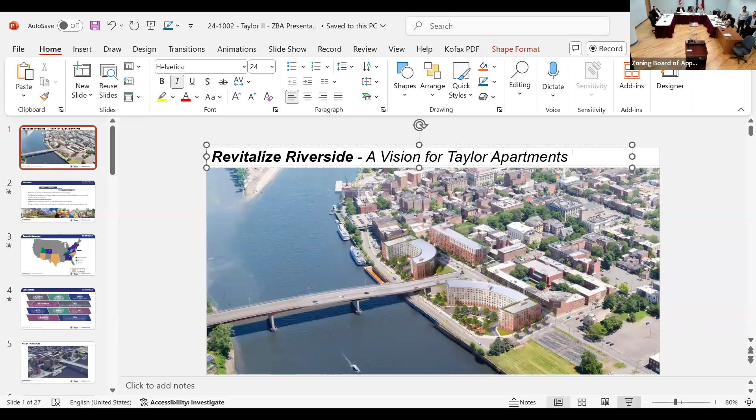Is this enabled? I can see this. Does it say enable? Or share? Share, yeah, of course. You can have my pencil. I'm using my red pen anyway. Actually, you know what you can do? Go to David's name, and then there's like 3 dots. Who, the mouse? David Marin. Okay, yeah, and then the 3 dots, and you should be able to just hit share. Yeah, it's not depend, I don't think. No, it's allowing you. Yeah, hopefully everybody else can see it. Okay. Little bit of delay.

Okay, good, all right. So next item on the agenda is PLZBA 2024-0022, 125 River Street.

This is Taylor 2, proposed 2 mixed-use buildings consisting of 308 residential units and just over 2,000 square feet of ground floor retail space. 2 6-story buildings on top of a 1-story parking structure.

The variances in front of us tonight are a front setback variance. Front setback within this zone is a 10-foot max, so setbacks of 11.5 and 13.2 feet are proposed for buildings 2 and 3 respectively. So relief of 1.5 feet and 3.2 feet for buildings 2 and 3.

Also a side setback variance, a relief of 14.6 feet and 25 feet for buildings 2 and 3 respectively. The applicant is seeking relief from the rule that freestanding parking structures and surface parking lots shall not be built adjacent to the river or any public pathway easement, in order to provide parking adjacent to the Hudson River.

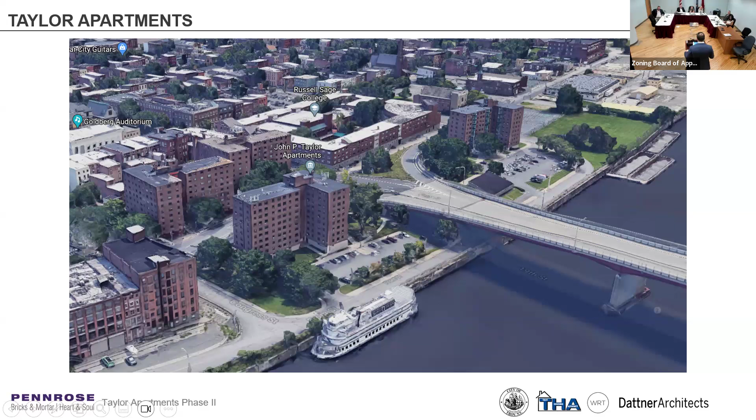So in the late 90s, early 2000s, the city, as part of its master plan, had developed a plan for this waterfront area. It was part of Realize Troy. And then within that master plan, the Housing Authority put out an RFP for the redevelopment of the Taylor Apartments, requesting proposals from developers around the country to come up with a plan to redevelop these properties that were really outmoded.

Taylor's 1 and 2 had been vacant since 2005, just boarded up, sitting there. Taylor's 3 and 4 have over 100 residents, as they do today. I'll get into that a little bit later.

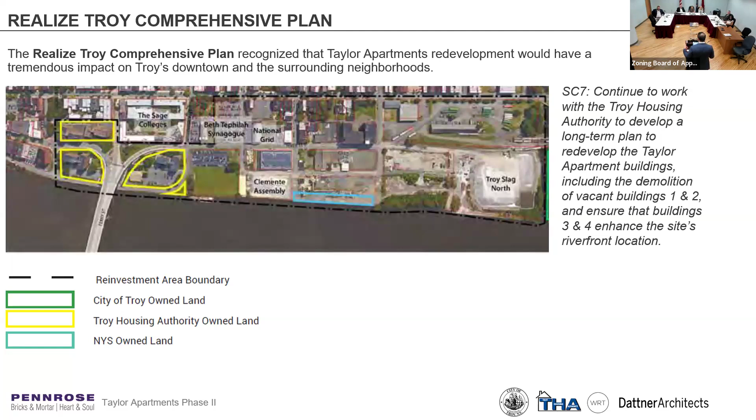I'm going to let Jen really talk about the architectural design and site plan, but part of the overall City of Troy plan was to not only redevelop the Taylor Apartments, but also redevelop the bridge, which you can see here with the ramps. The plan here was to get rid of the ramps, to square off the site and develop it as a full city block.

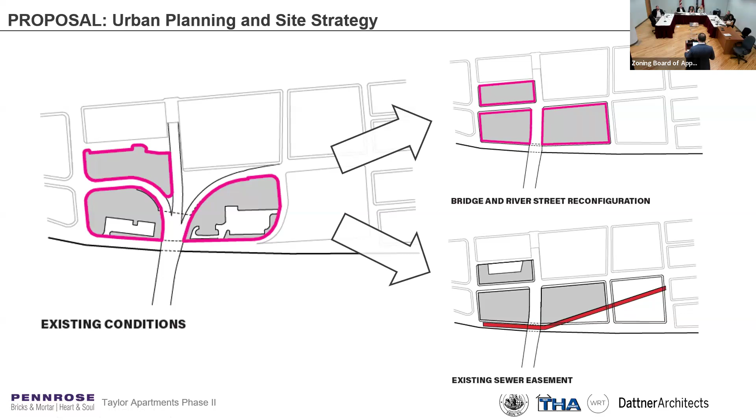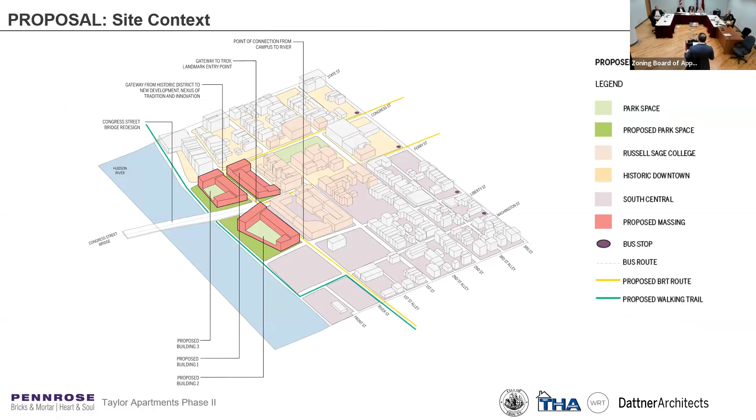What you see here is the proposal that Pennrose submitted to the Housing Authority and the city, which we were selected for — again with the plan that the bridge ramps would be removed, River Street would be completed, and we would have a full city block to work with here.

That plan changed because, after some additional investigation and work by the city and DOT, it was determined that the retaining walls of the ramps themselves were structural in nature, and to remove them would be very cost prohibitive. So through the design process we were told that was no longer going to happen, and we had to reimagine the plan.

And so what you see here — and I'm going to let Jen talk a little bit more about this — is the reimagined plan, which we've gone through some SEQRA review and site plan work for. It sort of hugs these bridge ramps and retaining walls that have to remain, which are not on our property, but that we now have to work around.

Taylor 1 is 141 units, 100% affordable housing. Taylor 2 is 308 units, mixed income. But the key here is that the original RFP and the plan we submitted in 2021 had to change, so we had to modify our approach. There were also changes to stormwater management, flood levels, and other things we've had to adjust for, which has shaped the plan before you tonight.

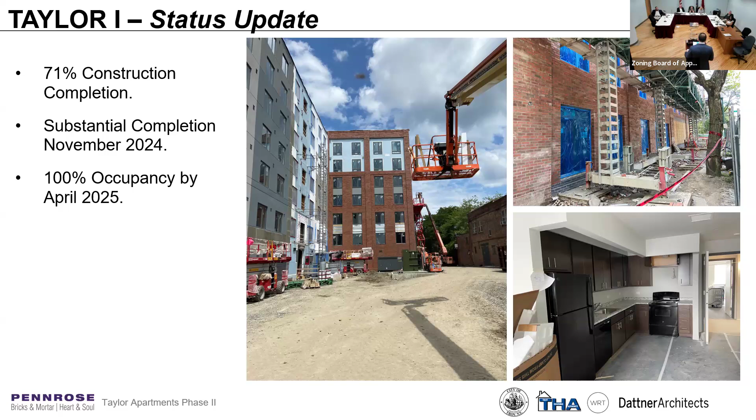We're just about to complete construction and start leasing up the building with the folks from Taylor's 3 and 4. And then our goal is that hopefully we can demolish Taylor's 3 and 4 in the fall of next year, and close on our financing and start construction in early '26. Construction would be about 2 years. Those dates for completion are a little off, but it'll be about 2 years to complete these buildings, and then we'll lease up those as well.

So just wanted to walk you through the entitlements process where we've been. We started our first planning commission meeting in March of this year. We introduced the project and applied to all the SEQRA relevant agencies. We came back in May where they designated us lead agency. And then in July this summer, they gave us a negative declaration. Also, after lots of conversations with them, the city, lots of good work with the planning commission, without us requesting, actually at the end of the meeting, they offered a resolution to the zoning board recommending approval of all the zoning variances that we're seeking here tonight.

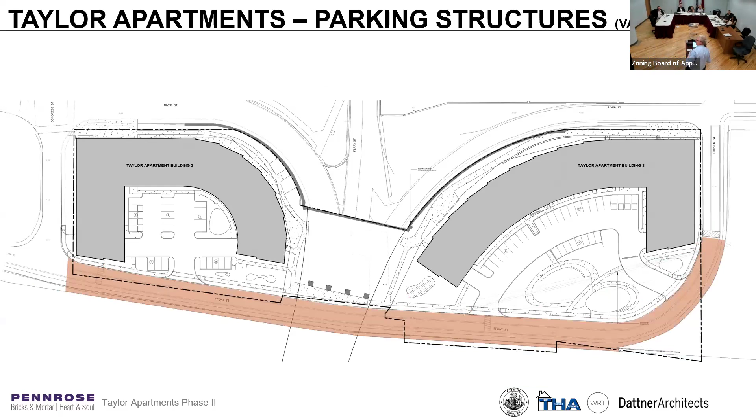Primarily drainage. Are any of those utilities being impacted as part of the Route 2 project that you're aware of? Not that I'm aware of. As I was saying, these lines as it comes down towards the river are the really big lines that are coming through and collecting drainage before it gets down to the river. So relocating them is probably pretty difficult from a size perspective. Also there's fiber optic lines and communications running through there as well.

Yeah, my biggest concern with this variance is the intent of the zoning, especially since we're in a downtown district. The city, with this major reconstruction project, is now trying to connect River Street through and have a continuous street frontage. You're now set back and also have an elevation difference. Have you had conversations with DOT?

Is there a way for us to connect the building to the street frontage at the grade of the street while still satisfying their easement or requirement? Have you had those conversations with DOT to try and mitigate that?

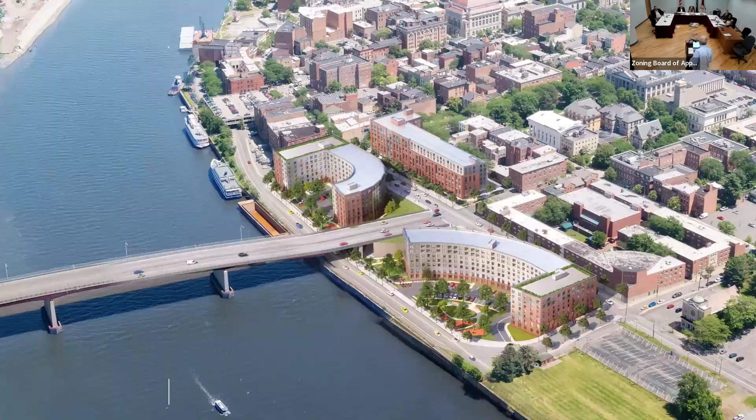Do you happen to have an interior site plan, like where you show the parking underneath the building? I don't know if we have that in this presentation. I don't have it printed out in front of me either, but maybe you can answer the question.

Two concerns. One, as far as the number of parking, I recall looking at the site plan that you are not doing ground floor parking underneath the entirety of the structure. Can you explain why?

Yep, so we are doing ground floor parking underneath the structure where we've brought more back into the building. At first, it was a much larger band, as it related to where the ground floor parking would be pulled in a little bit. That was happening primarily at those intersections because of how close we are to the building or to the roadway. There's a lot of topography that goes from the top, from River Street down to Front, where we're tight to the intersection and the buildings are close. That's where we stepped the excavation back so we didn't have as much excavation right next to the roadway and the utilities that are there. I think it's about a 17-foot cut in some of those spots, and you'd be just a few feet off to the side. So that was taken into consideration near those intersections.

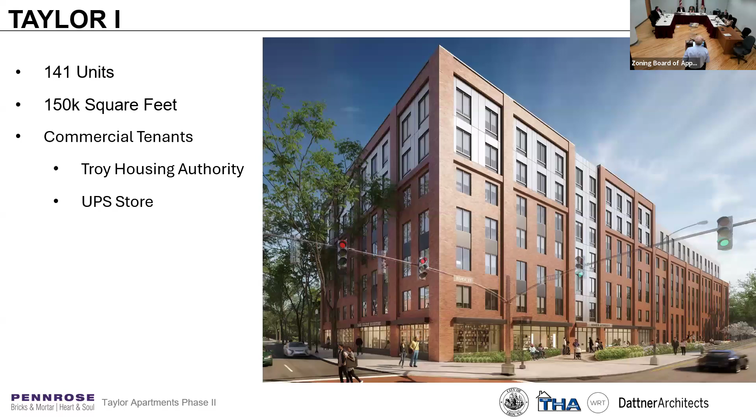With approximately 88 parking spots. Yep, so that would be about 0.70 parking spaces per apartment. Correct. If we take your proposed project, the number of apartment units increases from the current 125 to a proposed 308. That's not quite, but close to 2.5 times the number of units.

Agreed? Agreed. But you're proposing 88 parking spots. You haven't increased the parking, but you've increased the number of units from 125 to 308. I guess my concern is parking's an issue.

In your presentation, you talked about how many units of the 308 would be deemed middle income units. I didn't catch that number. Jen just brought it up on the screen here. So 58 of the 308 are considered middle income.

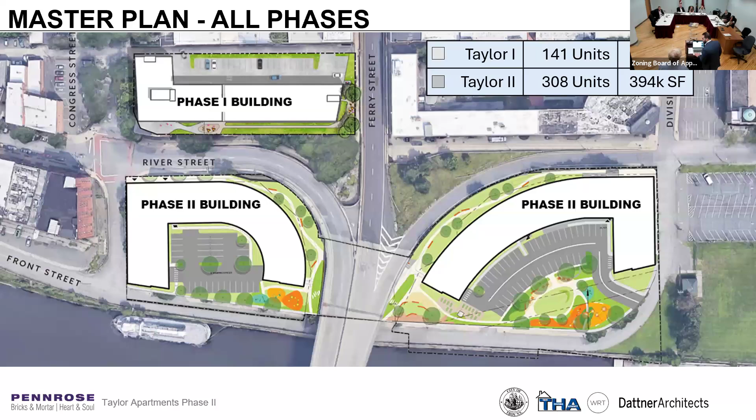Sorry, there's a delay. So at the bottom there, I don't know, I can't see that. It was 58. Yeah, and out of the 308, 125 affordable, 125 workforce, and then 58 middle income. Okay, so 125 would be workforce and 58 would be middle income.

And if I may, so during the planning board review of the project as it relates to parking, obviously it's an important topic. And one of the things that we've done as part of the plan was also look at bank parking options on the site, so that if we don't build them right now, but if the demand came up, we could add parking in later.

What do you mean by bank parking? What they do with bank parking is they reserve spaces that you could build if, say, you had a commercial tenant that was different or something that would require you to have extra parking spaces. You can bank it into the design so that you can have it as green space, but you could back it out later if you needed to.

So it's just one of the strategies that we were working with the planning board on, because I understand the need for parking and what's being said, but planning was asking us to pull some of it back. So we're in this balance where we're trying to find that spot where we're satisfying the planning board's requests as well as our needs. We want a successful project and we feel what we've got will work.

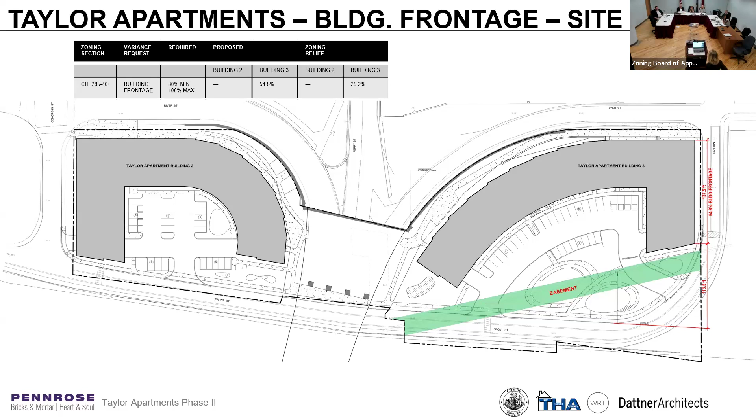We wouldn't, because for example with the side setback and all the other setback requirements, we're actually trying to comply with zoning as much as we can within the limitations of our site. If we wanted to tighten everything up, it would essentially be what the buildings are today, and that's not the intent of the new zoning. The variance request would just be different, much larger. Okay, thank you.

Can you add additional parking under the bridge since you own that? No, sorry, what's the question? Do we own it? Yeah. So if we put parking underneath the bridge, it's currently a very well-used and appreciated basketball court. Are you planning on making any improvements to said basketball court? No, not currently.

Should I just keep my mouth shut right now? But also, we have 4 piers for the bridge here as well that would completely stop us from being able to park there.

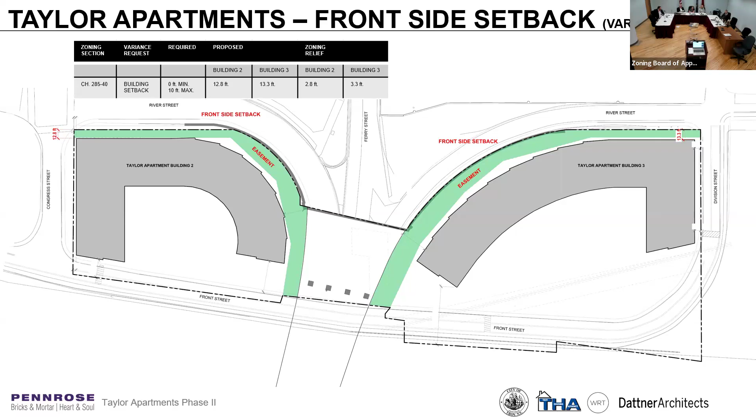One more question. The applicant is seeking relief from the requirement that buildings with 4 or more floors shall have a step back of at least 10 feet on each floor above the 3rd floor on the riverside. What are you proposing if the setback is 10 feet? What are you asking for? We feel we meet the intent of the zoning code because of site constraints, but as you can see in this diagram, our primary massing is along River Street. Our building faces along the water are really only 64 feet wide on each face, and we're already set back at the minimum of 50 feet from the mean high water mark or the bulkhead line.

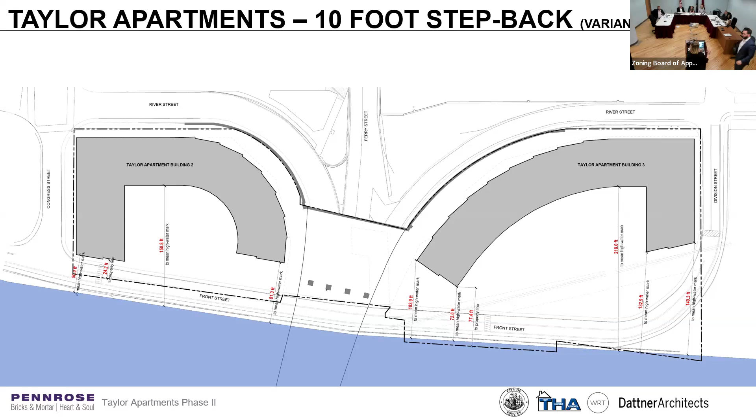And then the primary face of that building is 158 feet back. So what we're saying is that we're not negatively impacting the view from the water because we're already set so far back from the building, from the water line.

The aerial really does the best job of, in looking at the zoning code and talking about this, the purpose of the step back is to protect the view shed from the river. I think this rendering really does a great job of expressing how our building appears, if you look at all the other properties along the line, to provide the greatest view shed protection of all the properties along the river.

And as I mentioned, we had gotten the planning commission's resolution recommending the approval of all the variances at tonight's meeting. It was actually this variance which started a little bit of conversation among all the planning commission members, and I'm paraphrasing, not using their exact words, but that this building was unique to the riverfront, a modern uniqueness, and that it really started off the unanimous approval or recommendation to approve all these variances tonight.

So we're trying to meet the intent of lots of constraints, the constraints of the site, the constraints of our financing. HUD has restricted this property. We have to put back the 125 HUD restricted units that are here. And so the design that we came up with, well, I didn't come up with it, but Jen and Roger and the great team that we have, we think really creates a beautiful redevelopment of these Taylor towers that are going to come down. So hopefully you feel the same way.